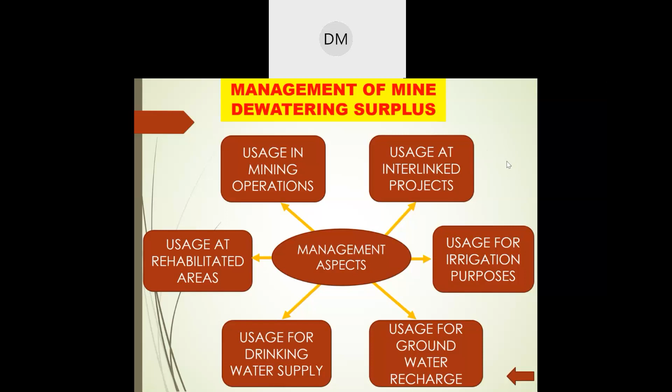Irrigation usage for irrigation purpose. This water can be supplied by a properly laid pipeline for irrigation purposes, agriculture and horticulture development. So groundwater withdrawal for agriculture irrigation purpose in that area will be reduced by providing this excess water.

Yes. Now, regulatory bodies. What are the main regulatory bodies? Starting from Indian Bureau of Mines, Ministry of Coal, Atomic Minerals Directorate for Exploration and Research, state governments, then state groundwater authority, just a second, sorry. Then again, Central Groundwater Authority and Ministry of Environment, Forest and Climate Change.

Here, nowadays generally mine blocks or leases are auctioned, and after successful bidding, a letter of intent is given to the project proponent for the lease. There are some basic conditions. Approved mining plan from the competent authority. Competent authority may be IBM if it is major minerals, Ministry of Coal in case of coal mining, Atomic Minerals Directorate for radioactive or atomic minerals, and the state governments if minor minerals are concerned. Then environmental clearance and bank guarantee; these three conditions are there.

So for approved mining plan, we approach the competent authority. In the mining plan, some basic technical requirements are given, like geology of area, exploration, mining, that is underground or open mining, blasting parameters, mine drainage, special in this case. That is depth of working, depth of groundwater level, quality and quantity of water that we are to encounter, pumping arrangements, place of discharge, and detailed hydrological report.

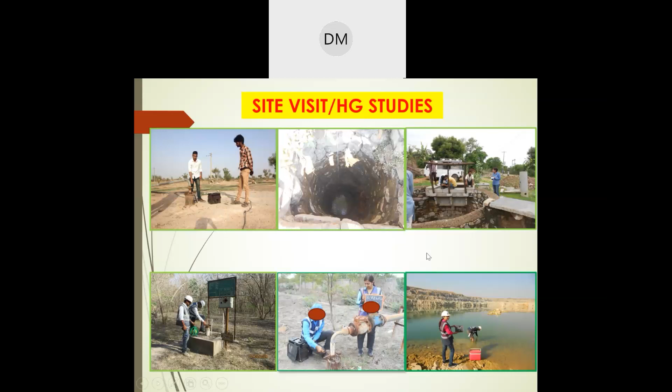Basic groundwater techniques for this hydrogeological study are installation of monitoring wells if possible in advance, which predict the hydrogeological conditions at mine area, groundwater monitoring systems in core and buffer zones, some dedicated observation wells or some other source of groundwater system. Groundwater modeling, you know, they are numerical methods basically to assess the flow rates and the radius of influence when we pump the groundwater from mine pit, and potentiality of these impacts.

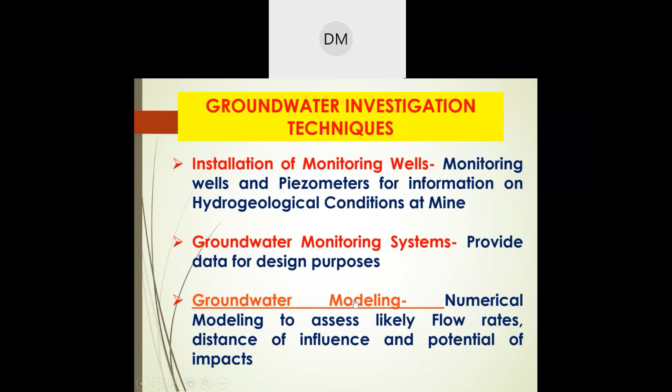Yes, a few major groundwater modeling softwares are Visual MODFLOW, Groundwater Modeling System, GMS, Groundwater Flow, Groundwater Vistas, and some basic data is required for groundwater modeling: maps, cross sections, fence diagrams. Maps give topographical, geological data; data on wells, location of wells, depth, diameter, type of well, static and pumping groundwater level; aquifer data, that is confined or unconfined aquifer or artesian, thickness of the aquifer, major hydraulic characteristics which we have discussed, transmissivity, storativity, permeability.

Geological data, that is soil texture, soil texture rates; geophysical climatic data, that is precipitation, evapotranspiration, evaporation; surface water if there are some natural surface water courses in the surrounding area; then quality of water, runoff distribution, etc. These are considered.

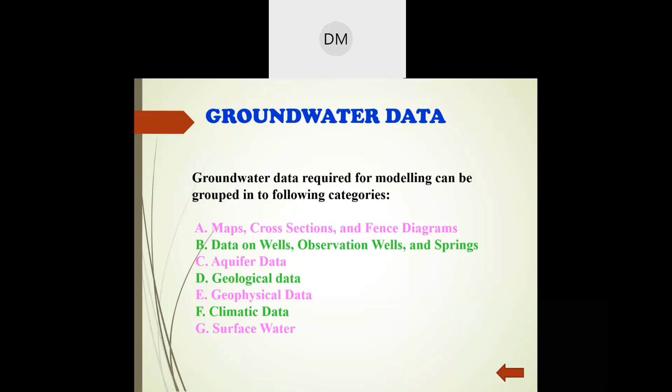Some field tests are also carried out: borehole permeability tests, the rising and falling head test, called slug test; soil infiltration test, single or double ring infiltrometer for permeability values; pumping test for transmissivity and storage coefficient of soil and rocks. Pumping test.

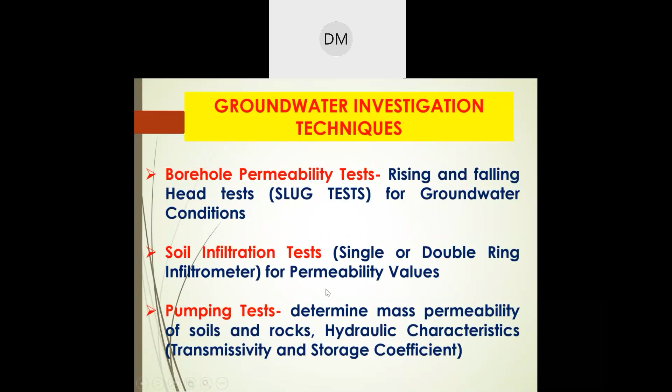You can say pumping test is basically a field experiment in which a well is pumped at a controlled rate and water level response, or you can say the drawdown, is measured in one or more surrounding observation wells. And if these observation wells are not available, the water level variations in the pumped well are also monitored, and the recovery values are considered for capability of aquifer. And response data from these pumping tests are used for hydraulic properties, that are transmissivity and storage coefficient.

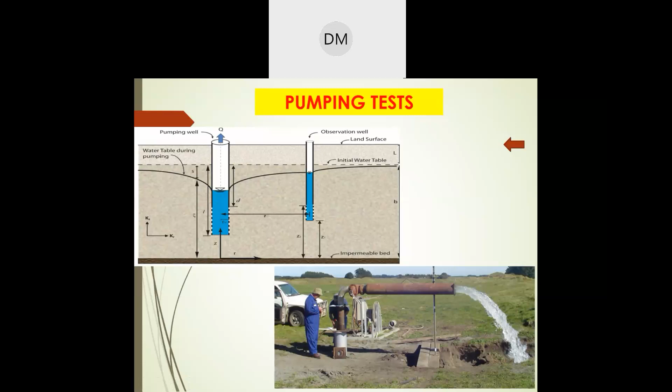And after this detailed hydrogeological study, we submit the application. Either a Central Groundwater Board online system is now there, or in some states, state rules, state authorities are there, like Telangana. Recently Punjab, Haryana, UP also started state rules for this groundwater or dewatering NOC.

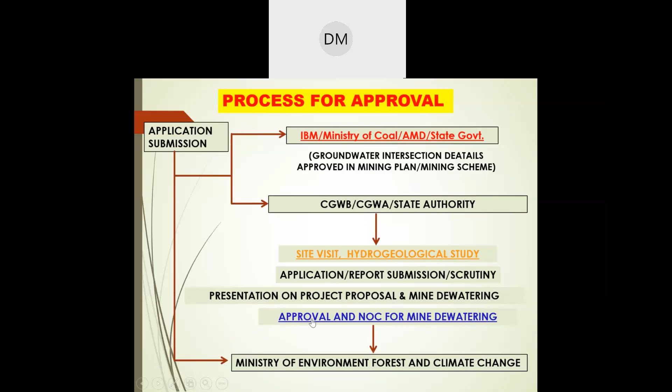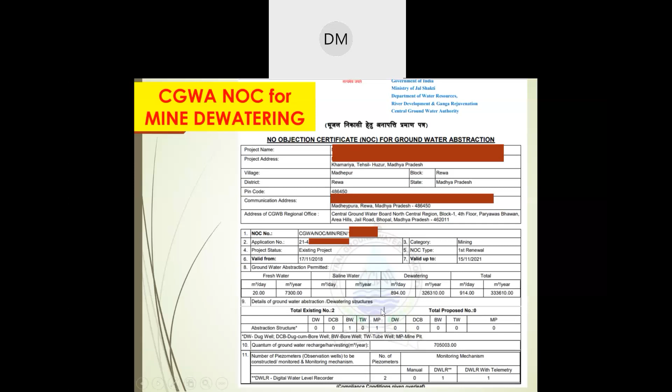If water withdrawal is more than 500 meter cube per day or KLD, generally two piezometers are necessary. One with digital water level recorder, and the other is digital water level recorder with telemetry system, for which password and account details are to be shared with Central Groundwater Authority. And in the NOC for mine dewatering, some conditions are there to be complied with, and after the next 1 year a compliance report is to be submitted.

These conditions are basically that the water available from dewatering operations should be properly treated and gainfully utilized. No water should be wasted in any way. Construction of observation wells or piezometers along the periphery or within premises, within the mining boundary. So for this condition, at least two piezometers must be there, one upstream and one downstream across the groundwater flow direction. If you are withdrawing water from other bore wells, definitely you must install some more piezometers near the bore well and in other different directions.

Apart from these piezometers in the mining area, some more observation wells, or you can say existing bore wells or dug wells, are to be selected for monitoring groundwater level for the buffer zone, that is 5 kilometer or 10 kilometer buffer zone as per the requirement.

One more condition is changed in the recent notification published on 24 September 2020 by Central Groundwater Authority: in case of coal mining and some other metal ore mining, when there are chances of contamination due to heavy metals and other contaminants, advanced dewatering technology must be used. Means perimeter dewatering wells around the mining pit should be used instead of in-pit pumping.

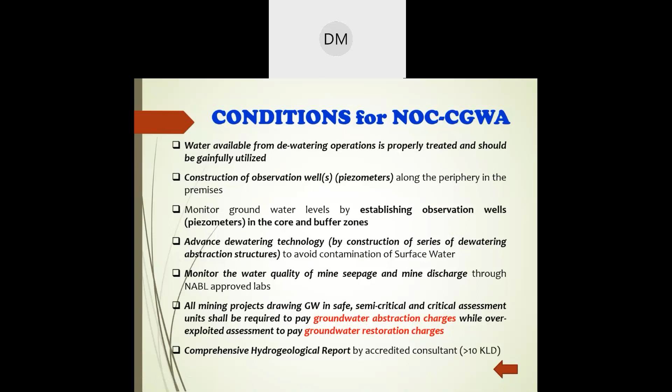And a comprehensive hydrogeological report is to be prepared by a consultant accredited by NABET or CGWA if water withdrawal requirement is more than 10 KLD. So this is all about.